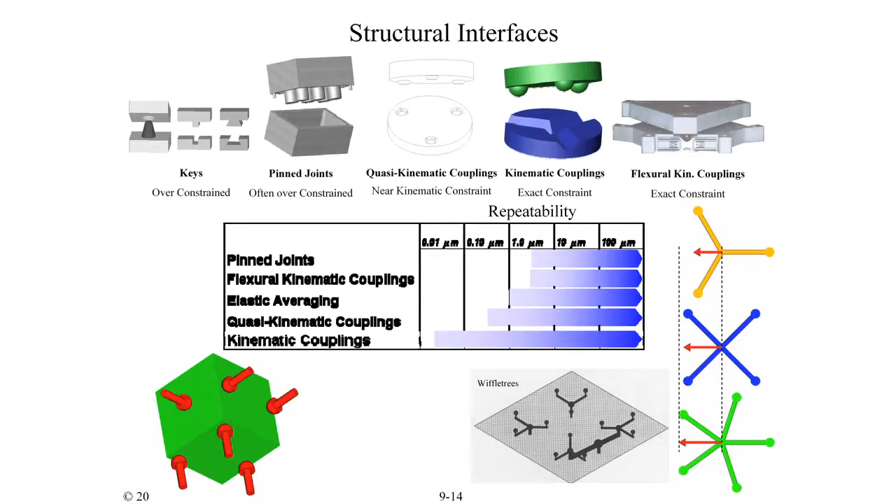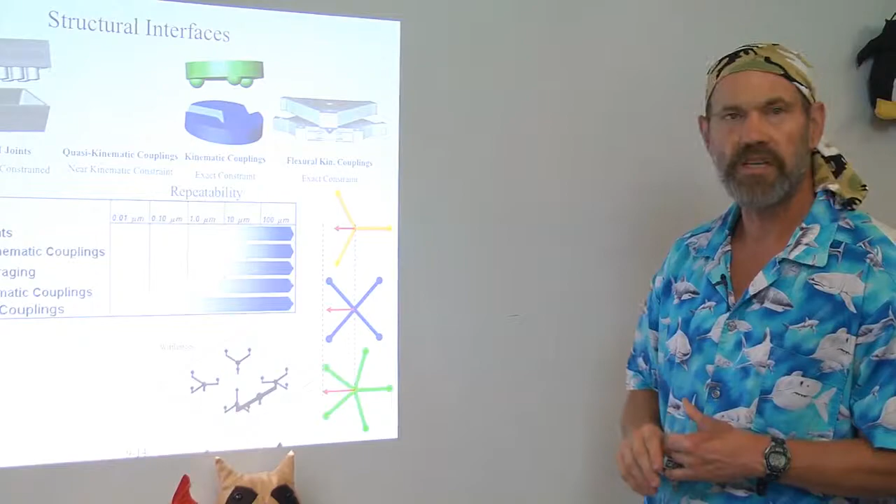Many different types of joints can do that, from what are called pin joints, these flexural kinematic couplings we'll get into in a bit, elastically averaged or Lego type joints, pins and sockets, more kinematic coupling types. How do you pick from all the possibilities? This chart here is supposed to indicate the realms of goodness in terms of repeatability these joints can get you. A normal pin joint, where you just have two surfaces that you want to hold together and you have a couple of pins in them, is only good to a few millionths of a meter, 5 to 10.

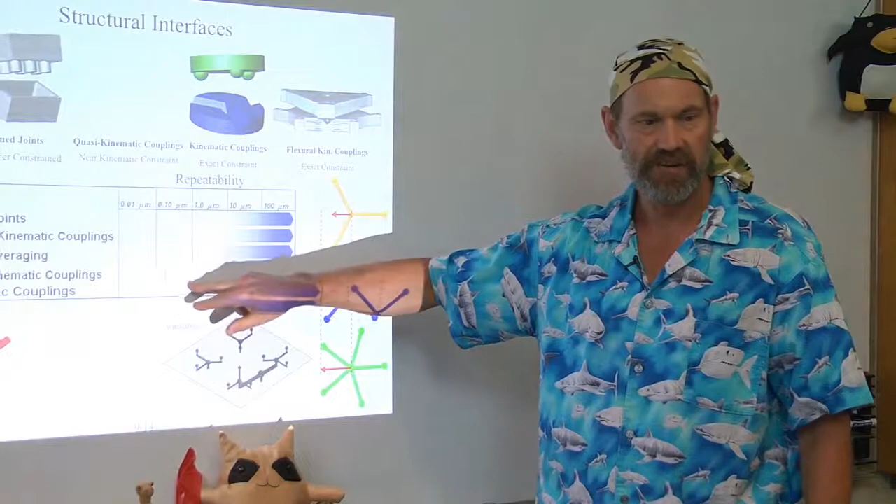You say, wow, that's a lot. Well, if you're doing a high precision piece of optical equipment, that's not going to be good enough. So we'll go through these different joints, but ultimately the highest precision will come from joints, and it gets kind of gray area here, it depends upon how well you put things together, where you either have a very, very high degree of elastic averaging, for example, many, many pins on Legos engaging, or an exact kinematic joint, one without any friction, where you know exactly where the 6 contact points are. And you get that, quote, no friction, for example, using air bearings.

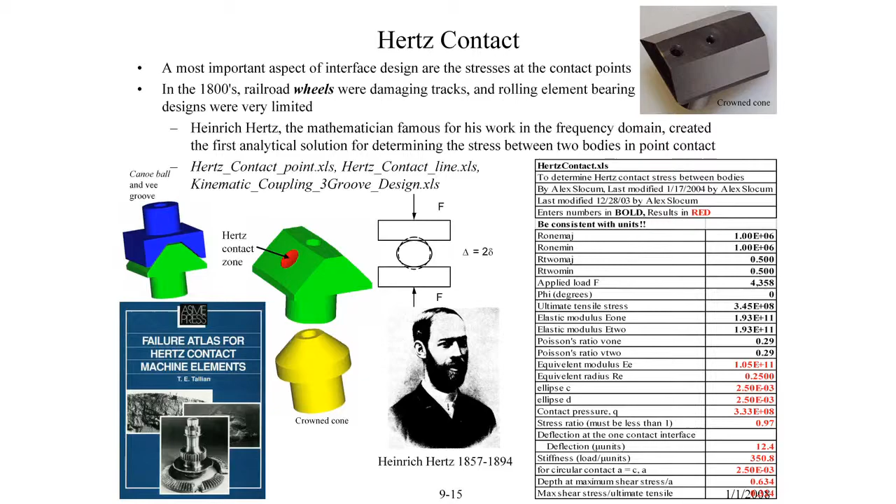But the most important thing to consider when designing a joint is if you have discrete points touching and the joint is heavily loaded, there's a very good chance you'll experience what's called Hertz contact. Hertz contact, named for Heinrich Hertz, very brilliant mathematician, the same guy who did frequency analysis, and hence the unit Hertz, or cycles per second.

The lore has it that a friend of his who was a railroad person said, Heinrich, I've got this locomotive and I push on it harder and harder by loading it with weight, so it'll haul a bigger train, and I break the train tracks. In other words, I've got a wheel, and as the wheel is rolling, you see the way it's deforming the tracks, my arm? You can see that deformation field on my arm. That's what's happening even with steel on steel. And that deformation field leads to stiffness being finite.

In a machine, that can be very bad if you're, for example, a machine tool, relying on being a really, really high stiffness machine, even under loads. So this dude is the one who figured out the mathematics behind what happens. There's a spreadsheet, of course, to help you predict what happens with stiffness in joints. And in particular, it goes through what is the stress at the joint.

A little experiment you can do in the privacy of your own study area to help you visualize Hertz contact stresses: take your writing instrument, a pen for example, and push on the side of your head until it, ow, hurts. Ow. Turn the writing instrument to where at least one side is flat, the other side can still be curved, and now push. You can take a lot more load before you hurt yourself. So how the radii of curvature of the contact surfaces engage to distribute the load is what Professor Hertz figured out. Infinitely valuable in designing joints.

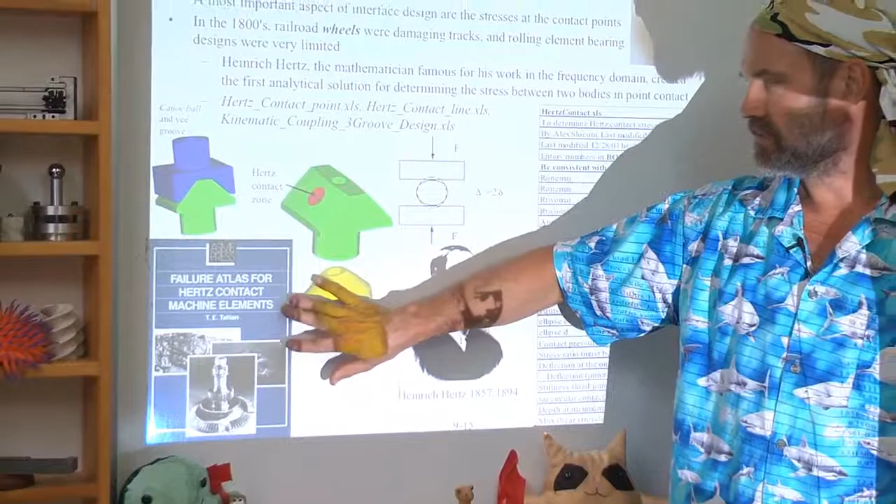Because of the high contact stresses, the potential for failure at the joint can be very high. And the type of failure mode you get, well, for example, a very nice book by ASME is called The Failure Atlas for Hertz Contact Machine Elements. Vast quantities of very interesting failure modes have been found over the years based on different materials, how they were loaded, and whether they fail by deformation right at the surface or with repeated motion back and forth. They actually have high shear stresses below the surface that cause the parts to delaminate and peel.

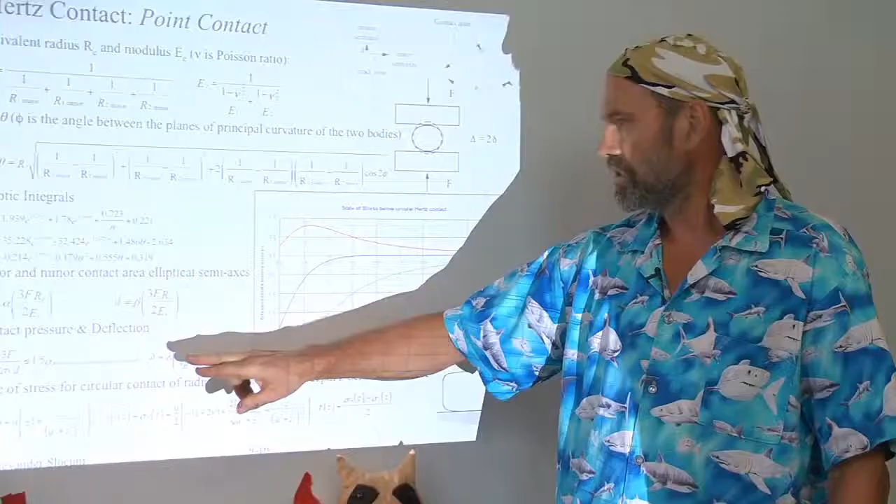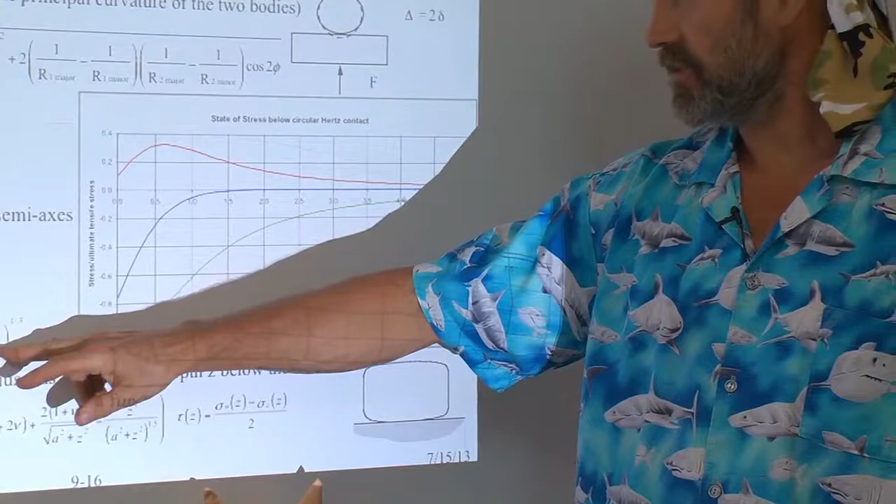The key thing about the Hertz contact analysis is its nonlinearity shows that the stress goes like, you can push harder and harder and the stress will not rise so fast. And the deflection goes like the force to the 2/3 power. So the stress goes like the force to the 1/3 power. The deflection goes like the force to the 2/3 power.

In line contact, similar relationships for the nonlinear stress and deflection as a function of force. In line contact, very important is, if you think about two cylinders, if they're crossed this way, that would hurt. Bang. But two cylinders crossed this way, not so much stress. The angle between the two will tell you, are you having point contact or the degree of line contact you have until all the way to full line contact, for example.

When you're looking at line contact, also remember very carefully, can I ever really have line contact? And the issue to be faced with is, if I have what I believe is a roller on a body, and the roller is loaded, say, by another plate on top, how uniform is the loading across that roller? If the loading is applied at all such that the roller is tilted, let me draw in cross-section here. If the roller is on one plate and there's another plate above it, and the loads are eccentric to the center of the roller, will I start getting edge loading of the roller?

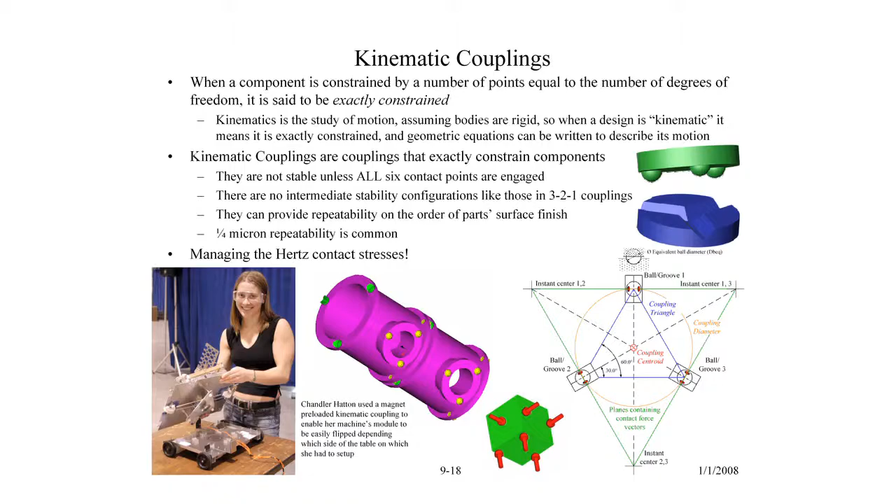If you don't have the grooves oriented properly, let's do this little experiment where we rotate them. And remember from topic 4, the idea of instant centers. I put this coupling together. It looks perfect, wonderful. But there is something really funny going on here with the stiffness of the coupling. Why is that? That is because the instant centers meet at a point in the center, which is why it's rotating about the center of the coupling.

Let's try to visualize this in 2 dimensions. What if I want to locate a flat part on a flat plane? The z direction is just defined by one flat sitting against the flat. But what I'm going to try to do is get x, y, and rotation. Z, pitch, and roll are just going to be defined by the 2 flat planes together. Where and how can I make things kinematically? Look here at this little wooden bench level experiment I have, where we can play what if in terms of the location of 3 contact points, because we have 3 degrees of freedom we're trying to define.

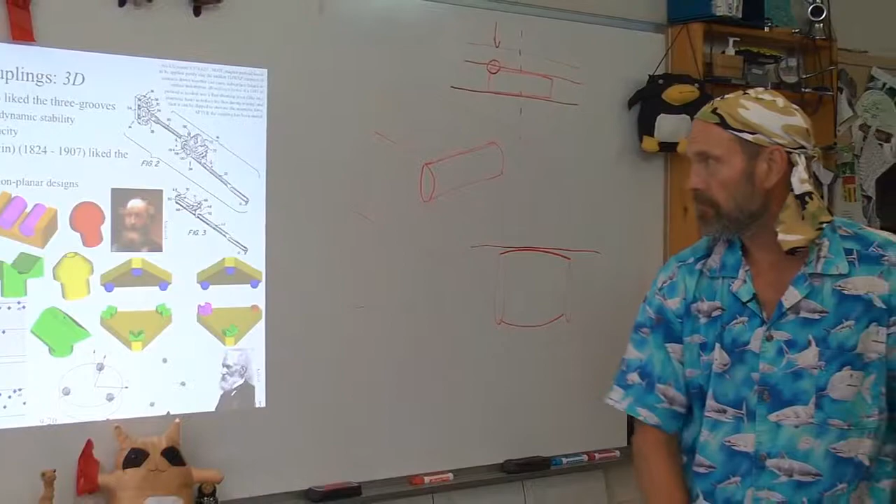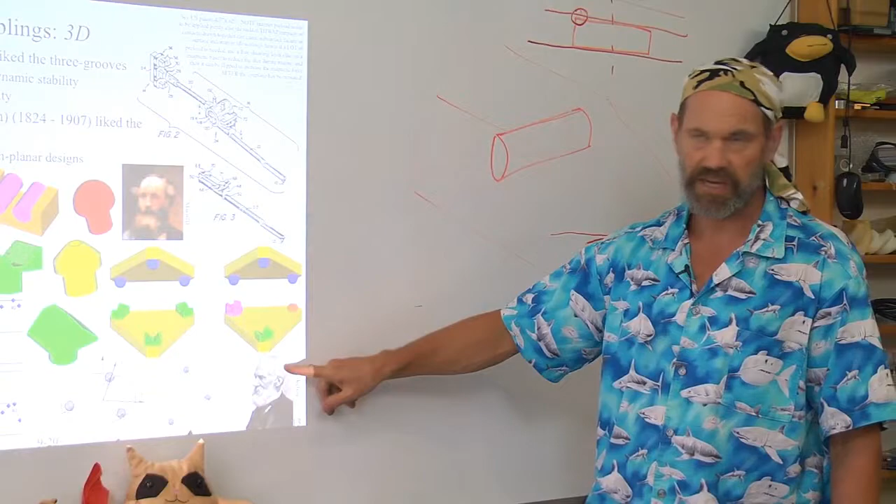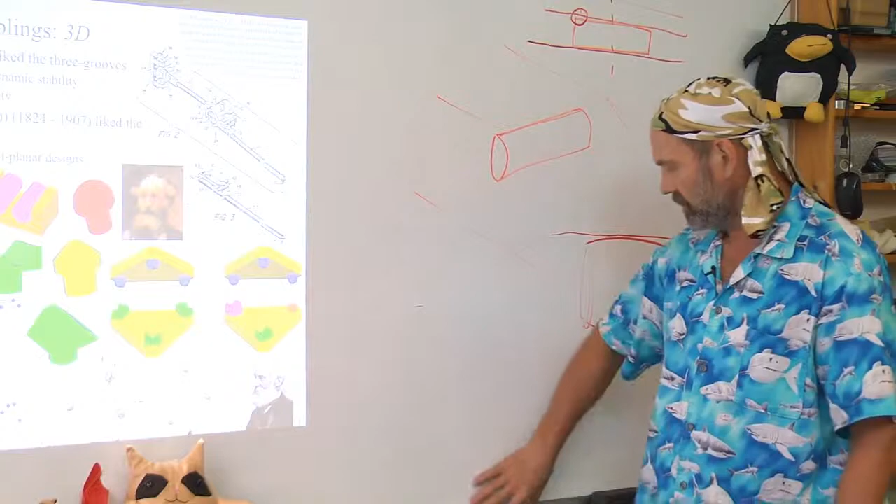In 3 dimensions, as we showed here earlier, you can couple 3 balls to 3 grooves. This was a type of kinematic coupling that James Clerk Maxwell, dude of light, favored. And then Kelvin, pretty hot dude, favored ball in a tetrahedron, ball in a V groove, and ball in a flat. And also notice very carefully here that this groove points toward the tetrahedron. I've seen some people do these couplings where the groove is not toward the tetrahedron. The key in these things is to make sure that the instant centers are such to maximize the stability of the design.

Three balls, ball flat groove, and what you'll notice here, this was a present that was given to me, is that the groove is not facing the tetrahedron. It's still going to be stable, so it's not wrong, but it's not as stable as it could be. It should be stable, period, but it won't be as stiff as it ideally could be. Okay?

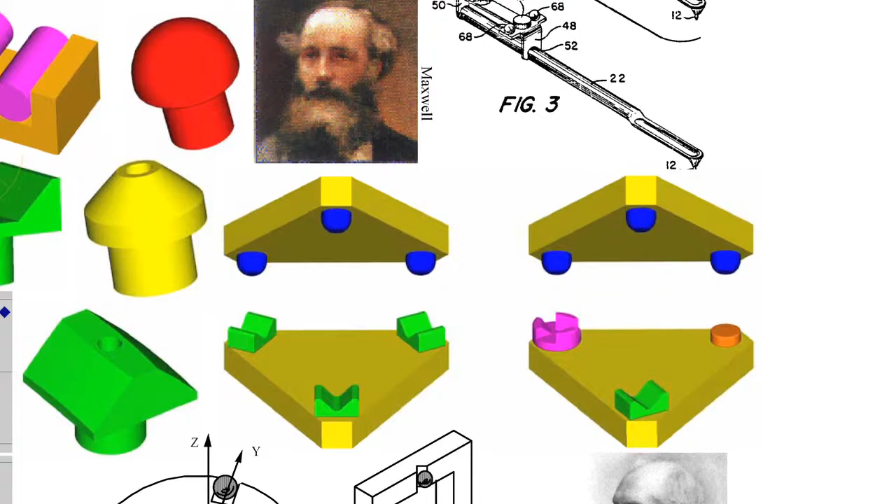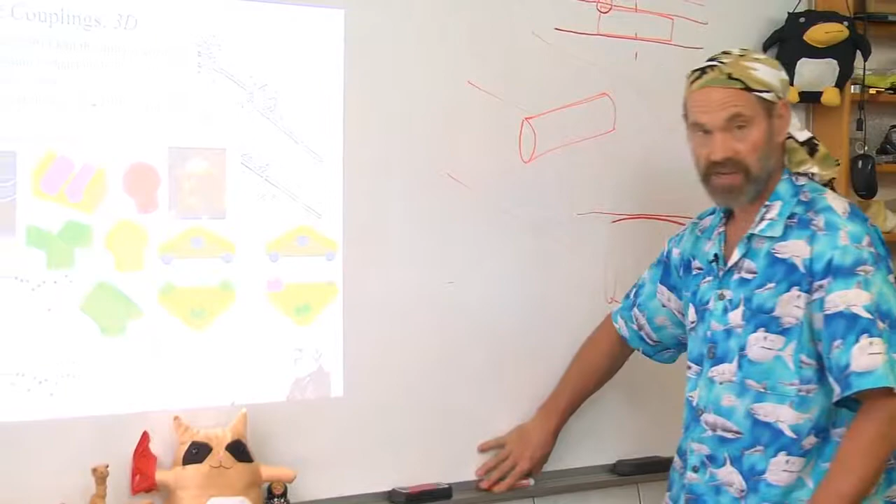All of these rely on using Hertz contact theory to predict the stress between the ball shape and then the groove of the tetrahedron shape. All of these can be manufactured by machining as it was shown here. You can make a V, if you don't have to have high load capacity, just by taking a rectangular slot and putting in a couple of rollers such that the ball then rests on the rollers.

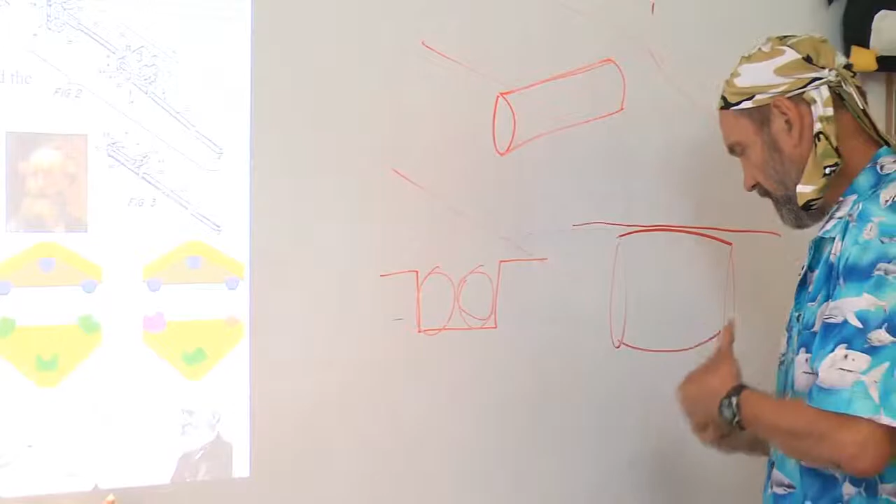You can take a half sphere on what is called a Gothic arch. The Gothic arch being, if this is the center of the sphere, the center of this arch is located over here, and the center of this arch is located over there. The purpose then is you're making the groove become more and more conformal to the shape of the ball, and you can handle higher and higher loads. All predicted by the Hertz contact theory, which is very, very accurate, by the way.

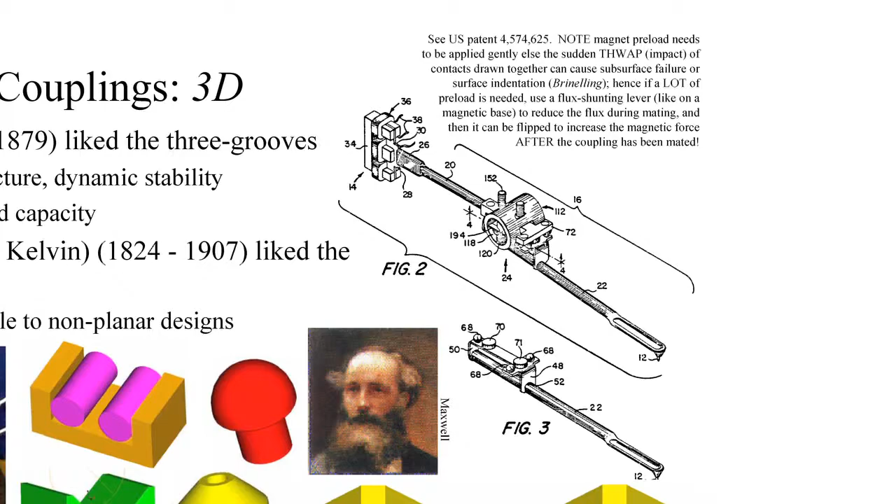How would I use this thing? Well, here's an earlier patent, 4,574,625 by Federal Products, where this was a probe for a measuring machine. And if you've ever used a measuring machine, you'll find sometimes that when people aren't being as careful as they should be, they drive the probe into the board and break it, or into the part.

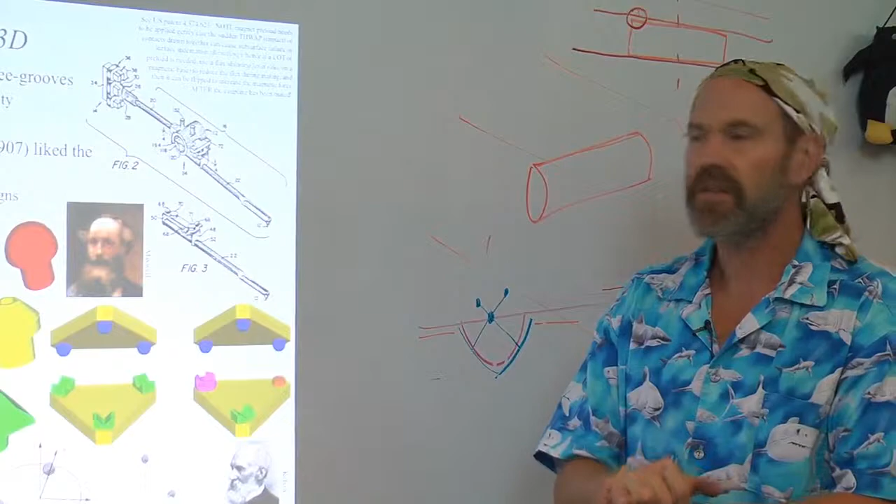So what Federal Products did is they put a kinematic coupling where they used magnets to preload the two halves of the coupling together. And if you push too hard, the magnets just let go, and you could pick up the probe and snap it right back on. Very, very useful. So very high rigidity, very high repeatability coupling, instantly replaceable.

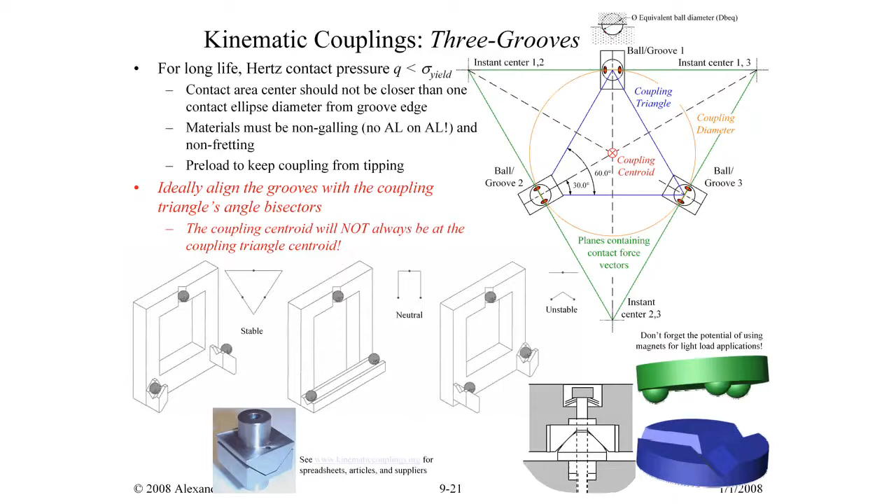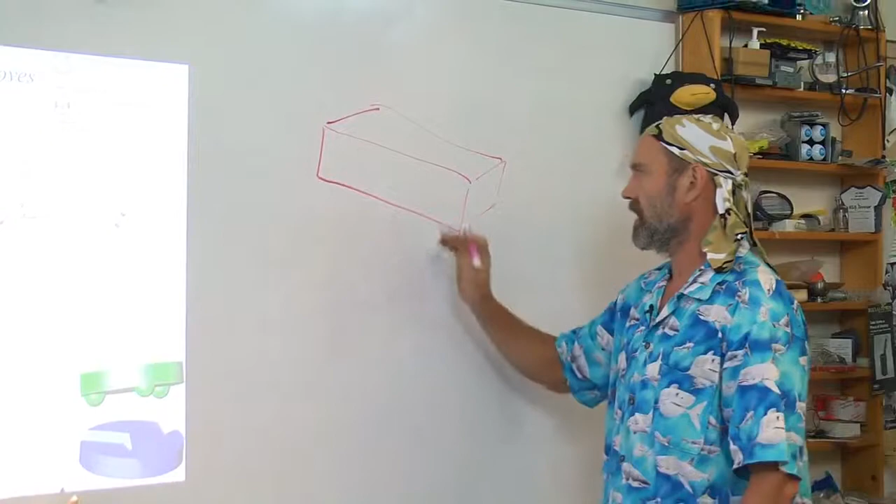So how do you design these things quickly? Well, in the simplest case, laying it out before you hit the spreadsheet, you have to establish the limits of where you want to be located. So for example, if I had something like the head of a laser, and I want to locate this laser in my experiment, I want to take it off for doing some sort of maintenance or out of the way for reconfiguring the experiment, but I want to put it back the exact same place.

And I have a couple of round feet at the front, and I would have in the back another round ball. So if I look at the top view of this thing, I have a ball here, here, and here. And generally, you start by putting your contact points as far out as possible. Next, you draw a triangle that connects the points. And the triangle doesn't have to be an equilateral triangle. It can be any shaped triangle.

Equilateral, if that's what your body encompasses, great. But don't force an equilateral triangle, for example, on the laser head just because you think all three legs have to be the same. It's more important that the legs or the points of contact are spread out as wide as possible to give yourself a good stance. Now, where do I put the grooves? We saw earlier that when I went from the grooves all facing toward the center to being faced like this, I lost my stability.

Well, it turns out that the grooves, I had a student, Bobby, who once created this experiment for me, which is really nice, this learning tool. See, it goes together very nicely. And the grooves are aligned to the center. They're not actually aligned to the center in all cases. What they're aligned with to get the best overall stiffness is through the angle bisectors.

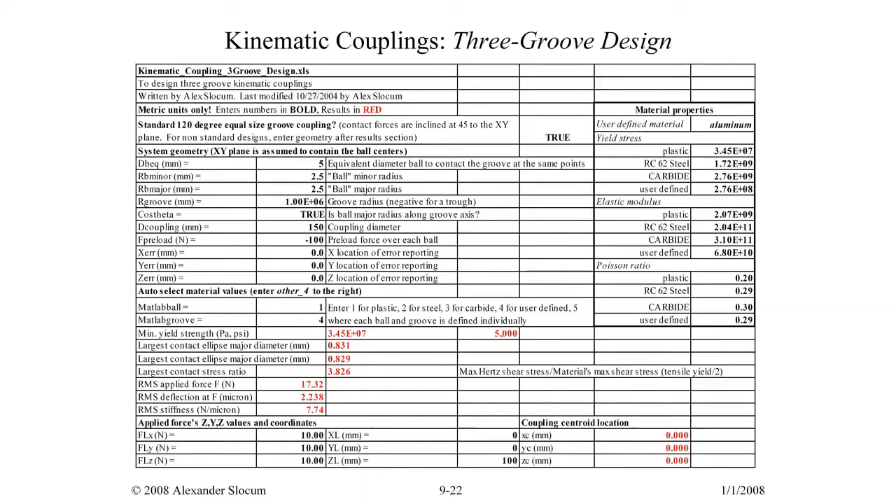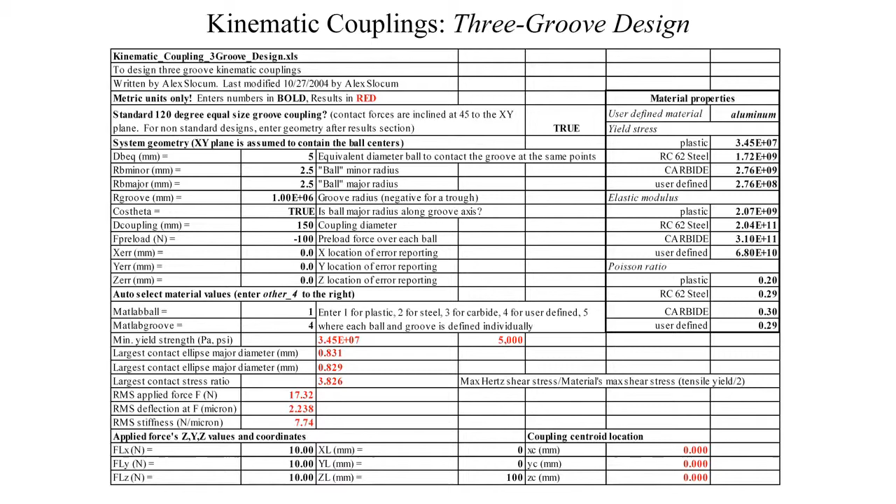Now, of course, there's a spreadsheet that goes with this, where you could go and play what if. What if I don't align things exactly along the angle bisectors? How would it affect the stiffness of the coupling? So go ahead and experiment with that if you'd like to. The spreadsheet, of course, calculates, given the size of all the components and the loads, what are the deflections and stresses. You could write one yourself, too, to do a check.

The theory is all well laid out in the papers that go with the text. Some of you may not like using a spreadsheet. You want to use MATLAB, so you can play what if. How would I detect the sensitivity of my coupling if the load varies a little bit, because the stiffness of the point contacts is far less than if you had two plates and elastic averaging?

The kinematic couplings are a softer interface than two well ground and bolted together objects, which aren't very kinematic, and you don't necessarily know where they're going to go. I mean, I can't have my cake and eat it too? Possibly. We'll come to that in a minute. Okay? But the moral of the story is it's very deterministic, easy to design.

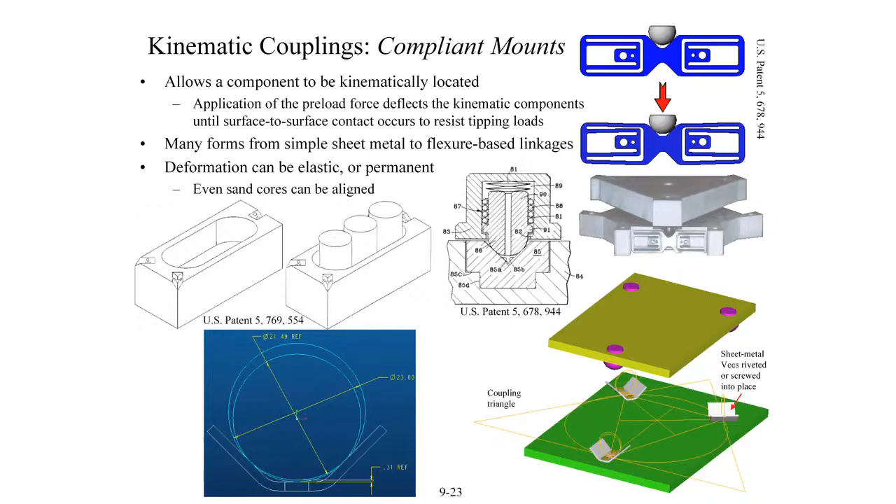Now, we just alluded to the fact that kinematic coupling is great for aligning two surfaces, but because of the finite Hertz contact stiffness, there is some softness in this thing. If I were to push down on it hard enough, I would either break the balls or the grooves. But because things have finite stiffness,

and for example, even this giant V groove, so this is from a very, very big industrial robot we did, where here's a V, and this shape looks, we call it a canoe ball. It's not actually a V, it's a surface with a half-meter radius of curvature in 2 dimensions. So it looks like a section of a very large sphere.

So you think, wow, that's got to be plenty stiff compared to just the wooden ball in the V groove. Sure, this is much, much stiffer. But in a giant robot with giant loads, where you still don't want any deformation, it still is finite.

Can we design the coupling such that when we push on it, for example, the V is on a flexural bearing spring, such that it will then deflect and then let the two flat surfaces come into contact? How do we design desired compliance into that ball V groove coupling or interface to give us, when it first engages, location, and then displacement to allow two flat surfaces, which now can have very, very, very high stiffness, to come into contact? So that's the essence of what a compliant mount kinematic coupling is.

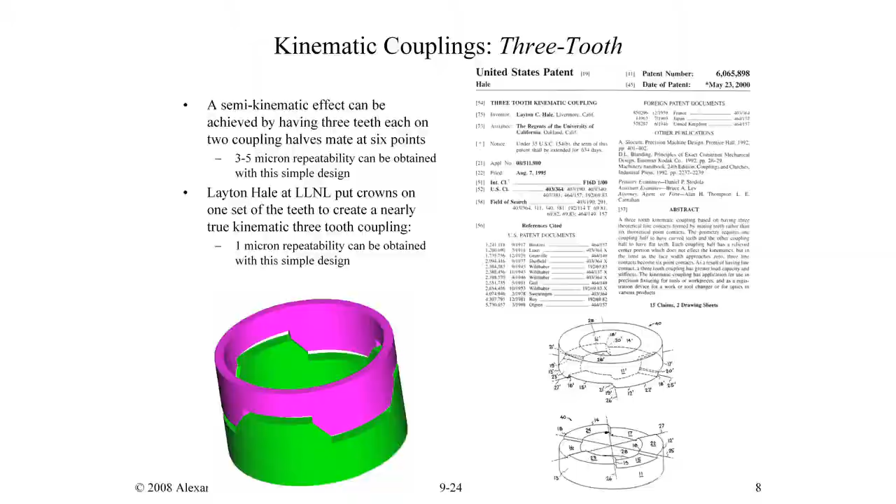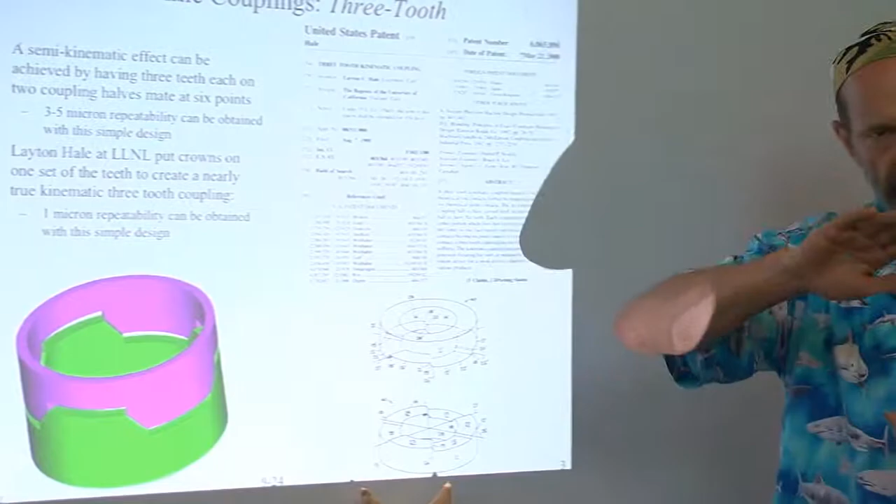Must it be a ball in a groove? Can we get something that's good enough? On our way to something called a tooth coupling with many teeth and elastic averaging, this is a 3-tooth coupling. And in the ideal world, the teeth are designed such that one surface has a flat surface and the other one has a spherical surface, so you still end up with exactly 6 points of contact. Or they both have a slight spherical surface, so the two parts are exactly alike. And because the radii of contact can be very large, it still looks like a flat on a flat.

So I had a student long ago, Layton Hale, who designed this specific type of coupling. This is actually one he made himself. And the nice thing is in this instance, it's 2 exact parts that come together and have very high stiffness. Notice the 45-degree contact angle here: if you were to use this as a joint, like for transmitting torque, and you applied too much torque, it would slip out. But when properly preloaded, this could transmit enough torque to shear the shafts off.

Can you make this an injection molded plastic just with flat tooth to flat tooth and still have it work good enough? I bet you with the teeth being of finite stiffness and length, you can actually have them just be flat on flat and they'll come together. Apply a little bit of load, the teeth will deform, and it'll act like an elastically averaged part, and you can make a very, very low-cost plastic coupling, very, very high load capacity and stiffness, all with 3 teeth.

What if I want even more teeth for more load? This is a part of a coupling that normally you would have teeth all the way around. This is rapid prototype, which is why I have this 2-part one. And you can see when teeth come together, if you are within the range of motion of the angular displacement of a tooth, when you push on it, it will force it to rotate in alignment. And once in alignment, if you clamp it hard enough, the teeth will deform, and now it'll look like a solid joint.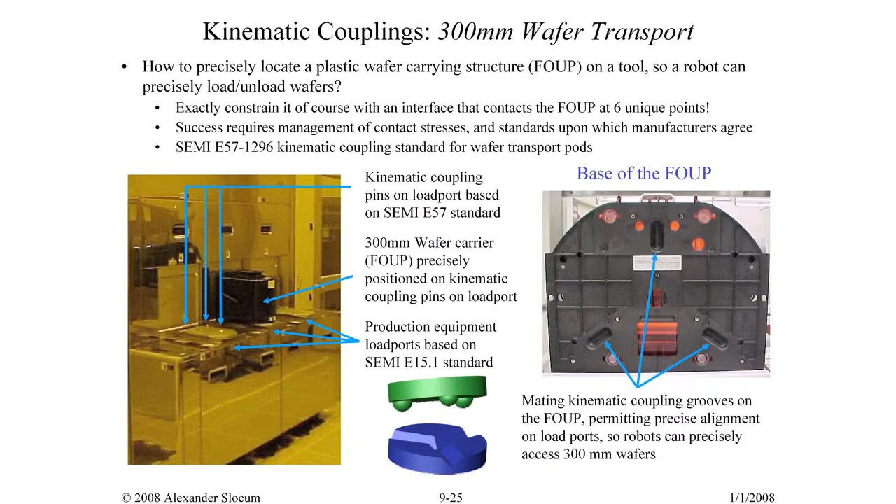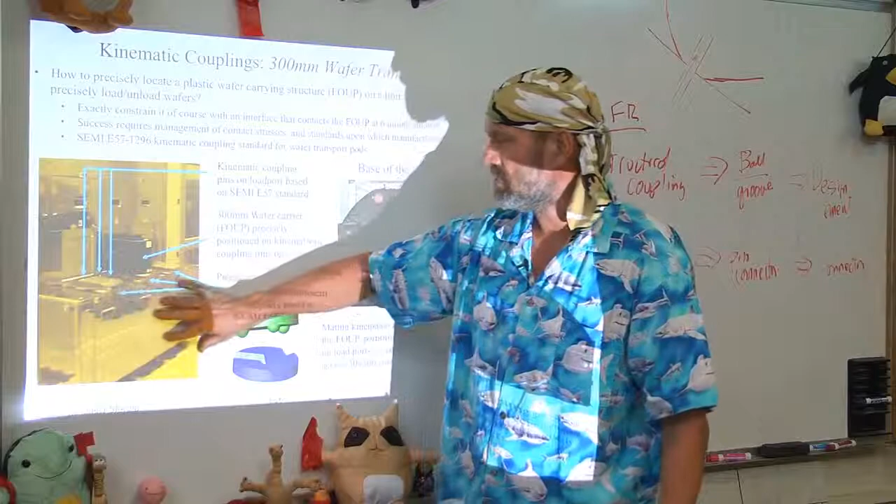Let's look at a practical example. Semiconductor wafers. Semiconductor wafers are carried around in cassettes within the factory. And what you see here is a tool, and this big black cube, about the size of a milk crate, holds semiconductor wafers, silicon wafers.

And if my friend could pass me my wafer cassette right behind him, yep. Just happened to have one lying around the office. Can you believe it?

Well, this is for 200 millimeter wafers. I did a lot of work with Sematech over the years. And this shape on the bottom here is called the H-bar. It was an evolved design through many years, starting with smaller wafer carriers, trying to make everyone happy, which it did for a while. And this H-bar would mate with another H in the tool. But because it was these lines, and all these lines have tolerances, there was always some rattle. And in the end, the H would never exactly line up.

The result is, when you put the part down on the tool and the robot would come in to get the wafer, it would sometimes bang it, which would break the wafers, which is bad. So I came on the scene for another part of design review and work with Sematech on the robot end, and was very frustrated with how poorly these cassettes were located. And when the move to a 300 millimeter wafer was suggested, I did the analysis that showed you would be breaking wafers a lot.

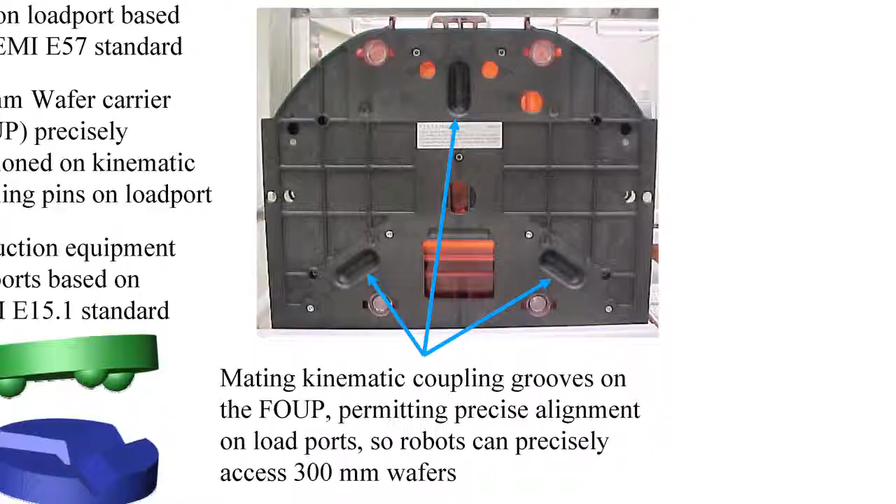And I took one of these cassettes, and unfortunately the original is still at Sematech, and I glued on 3 grooves. Or I might have put balls on here and then the grooves went on the machine. I don't recall which one. I think we put the balls on the cassette. By having a ball, and then on the back side here added a bar and another ball, made it kinematic. And I was thus able to show analytically that because I always knew where the wafer cassette was, the robots could pick the wafers out of the cassette with very, very high accuracy.

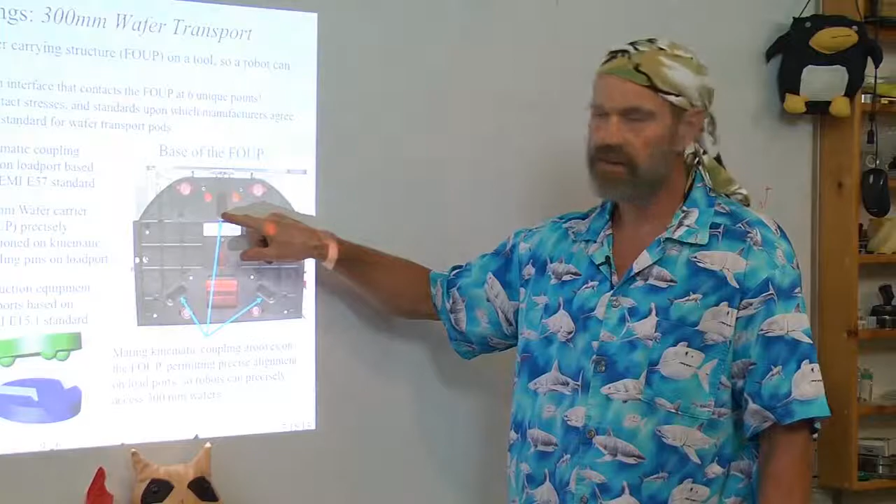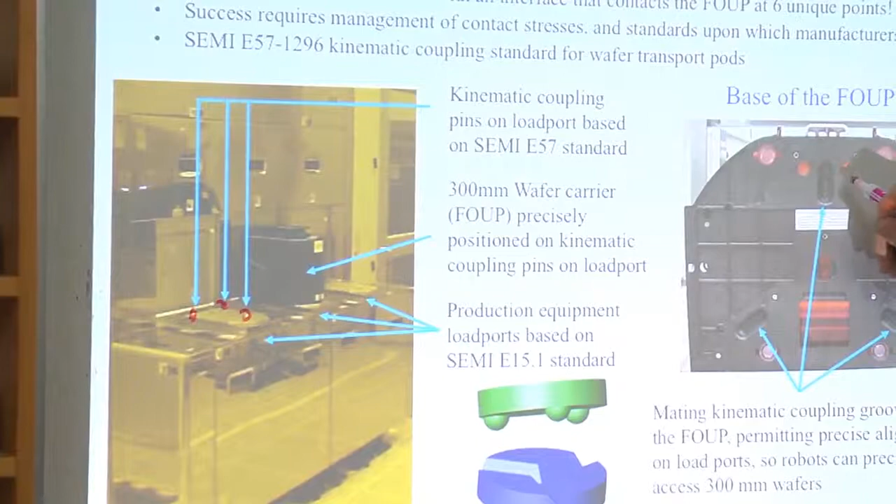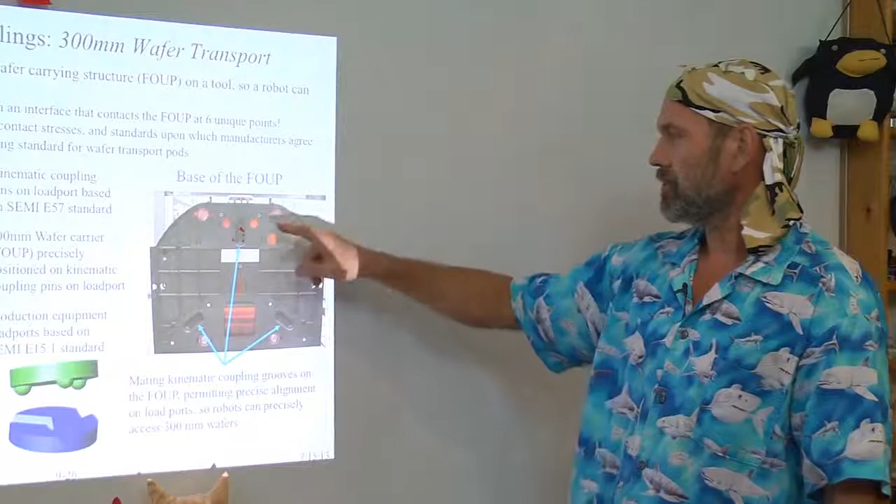That went through very quickly with contacts and friends at Sematech, industry working together to define, and in the end they wanted the grooves on the cassette and the balls on the tool. The reasoning is very simple. If the grooves were on the tool looking up, dirt could get in the grooves and contaminate it, and there should never be that level of dirt in any of these tools anyway. But we're talking dirt on the micron level and smaller. By the grooves being on the bottom, they'll stay cleaner, and on the balls, any dirt that falls, and remember we're talking submicron particles, just sloughs off.

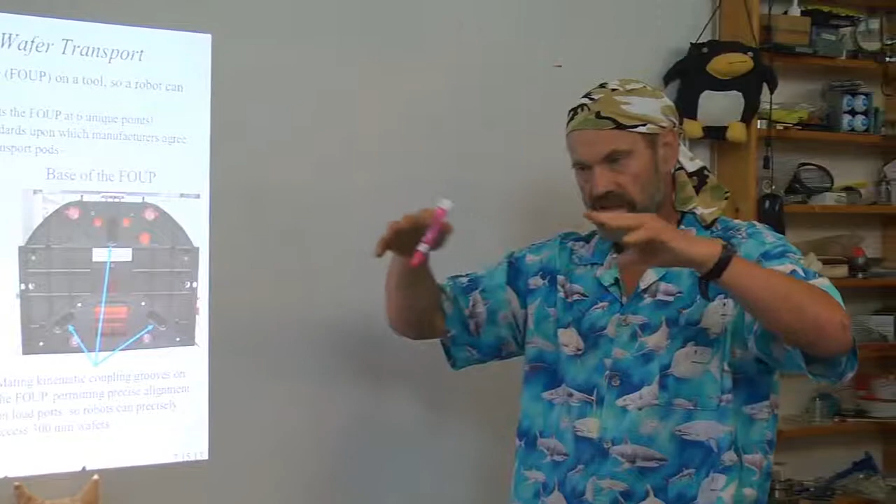It's standard: all 300 millimeter wafers, and even now the new big 450 millimeter wafer cassettes, all use these couplings. Allowing a robot to come in and place the cassette with not that great accuracy, and then it will snap into place. See how that just dropped? I'm not accurately aligned, but I put it down and it comes right into position. Very, very powerful machine element tool for you to use.